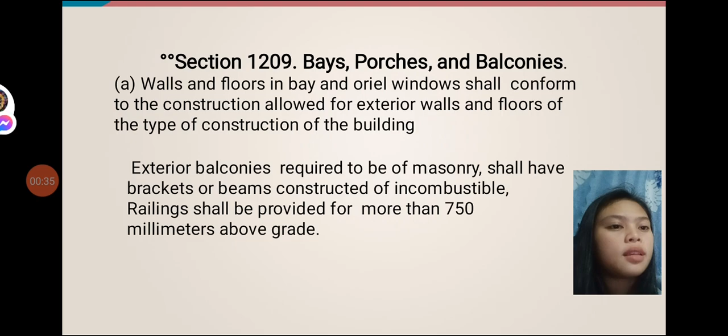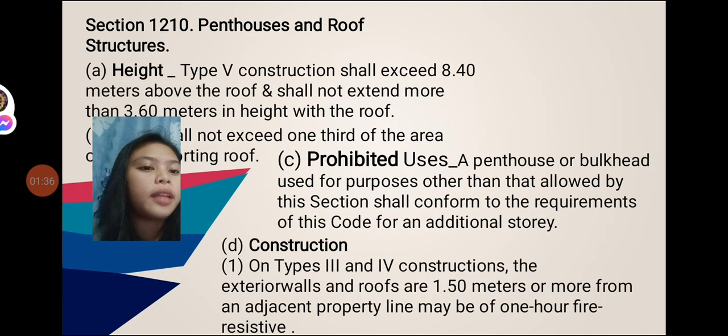Then the construction: on type 3 and 4 constructions, the exterior wall and roof that are 1.5 meters or more from the adjacent property line may be of one-hour fire resistive. Then walls not less than 1.5 meters from an exterior wall of type 4 construction may be one-hour fire resistive.

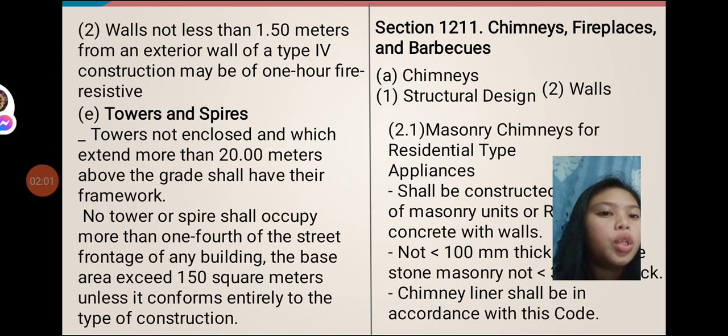Then towers and spires: towers not enclosed and which extend more than 20 meters above the grade shall have their framework. No tower or spire shall occupy more than 1/4 of the street frontage of any building. The base area shall not exceed 150 square meters unless it conforms entirely to the type of construction. So it depends on what type of building.

Then Section 1211, this is the chimneys, fireplaces, and barbecues. Then the chimney structural design: the masonry chimney for residential type shall be constructed of masonry units or reinforced concrete with walls not less than 100 millimeters thick, or rubble stone masonry not less than 300 millimeters thick. The chimney liner shall be in accordance with this code.

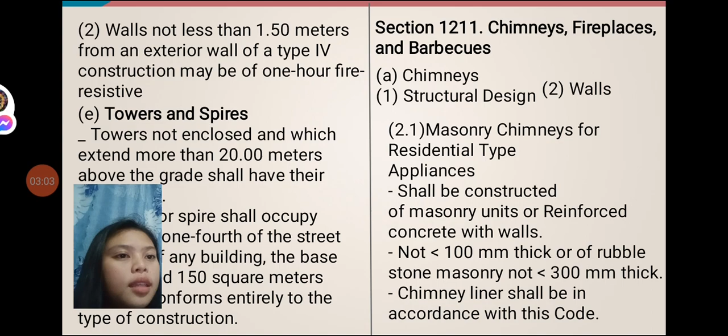Then masonry chimneys for low heat appliances should not be less than 200 millimeters thick, except that rubble stone masonry shall not be less than 300 millimeters thick. The chimney liner shall be in accordance with this code.

So masonry chimneys for medium heat should not be less than 200 millimeters thick, except that stone masonry shall not be less than 300 millimeters thick, lined with not less than 100 millimeters of fire brick laid in a solid bed of fire clay mortar with solidly filled head, bed, and wall joints, starting not less than 600 millimeters below the chimney connector entrance.

On the other hand, masonry chimneys for high heat appliances shall be not less than 200 millimeters thick with a space of not less than 50 millimeters between walls. Inside the interior wall, fire brick not less than 100 millimeters thick is laid in a solid bed of fire clay mortar with solidly filled head, bed, and wall joints.

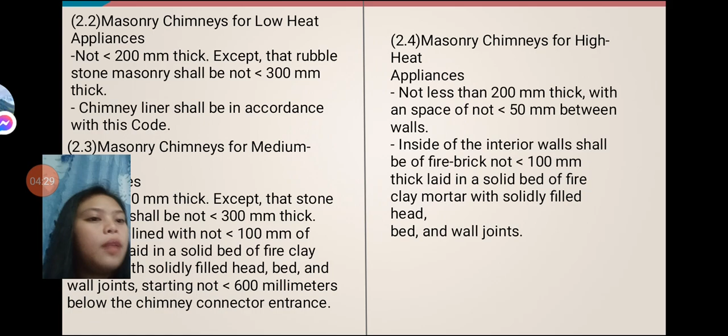Then masonry chimneys for incinerators installed in multi-story buildings, the apartment type: where the horizontal grate area of the combustion chamber is not greater than 0.80 square meter, the wall should not be less than 100 millimeters thick with a chimney lining as specified in this code.

And if the grate area of such an incinerator is greater than 0.80 square meter, the wall shall not be less than 100 millimeters of fire brick, except when it is greater than 9 meters above the roof of the combustion chamber, common brick alone 200 millimeters thick may be used.

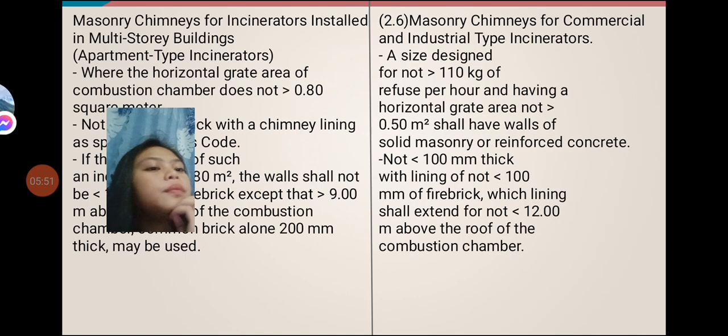So masonry chimneys for commercial and industrial type incinerators of a size designed for not greater than 110 kg of refuse per hour and having a horizontal grate area not greater than 0.50 square meter, shall have walls of solid masonry or reinforced concrete not less than 100 millimeters thick with a lining of not less than 100 millimeters of fire brick, which shall extend not less than 12 meters above the roof of the combustion chamber.

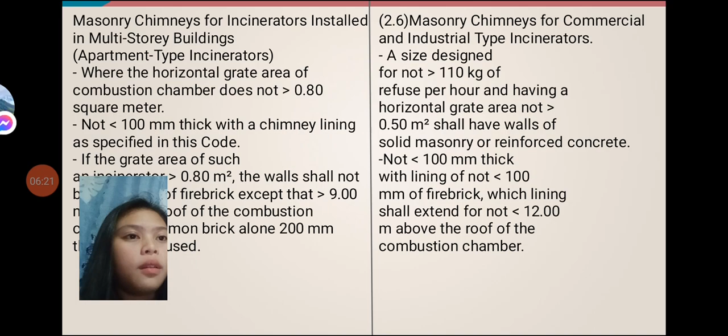Then, if the design capacity or grate area of such an incinerator is greater than 110 kg per hour and 0.80 square meter, respectively, walls shall not be less than 200 millimeters thick, lined with not less than 100 millimeters of fire brick extending the full height of the chimney.

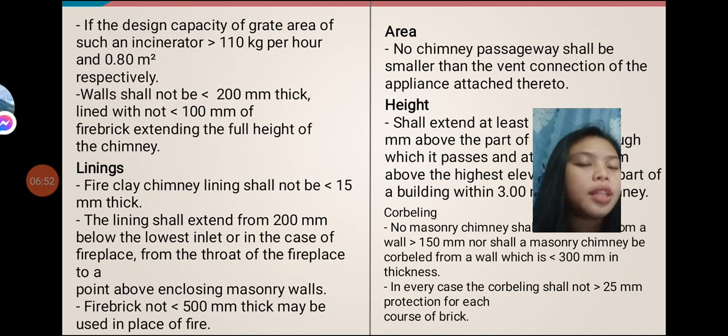The lining shall be continued by Miss Elondo.